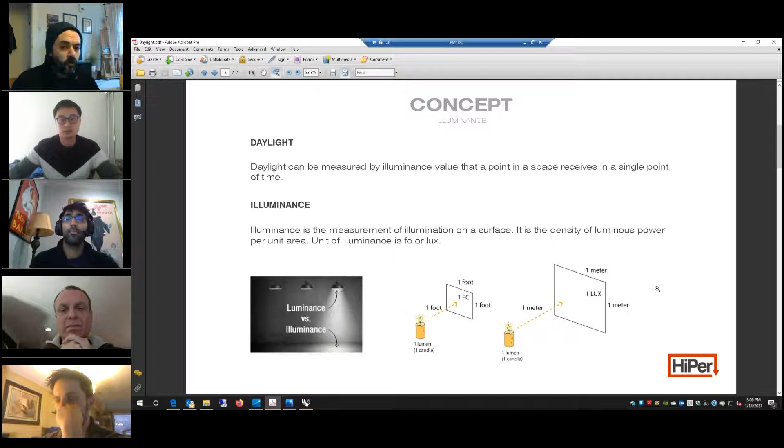So illuminance is a point-in-time measurement of daylight. But for the annual daylight study, we know that there are 8,760 hours in a year, and the occupancy hours are different based on different building types. So we are using 2 concepts to measure the annual daylight.

If you want to further quantify what percentage of these red and yellow areas are of the total area on the floor being analyzed, that is the concept of spatial daylight autonomy. Spatial daylight autonomy is the percentage of areas that receive sufficient daylight in a year. So daylight autonomy is the percentage of time, and this is the percentage of area.

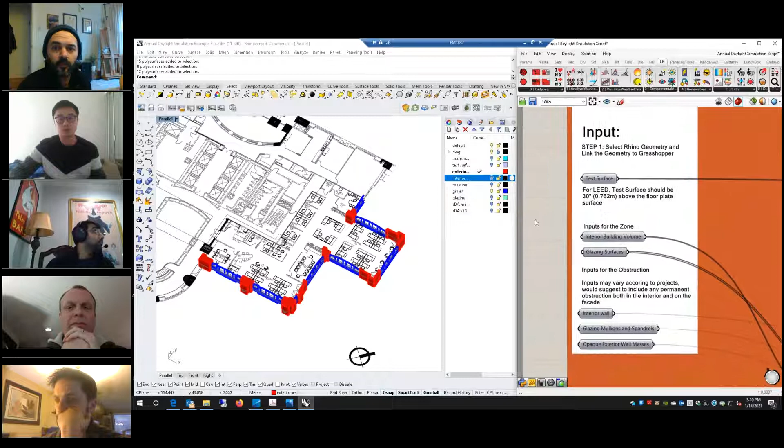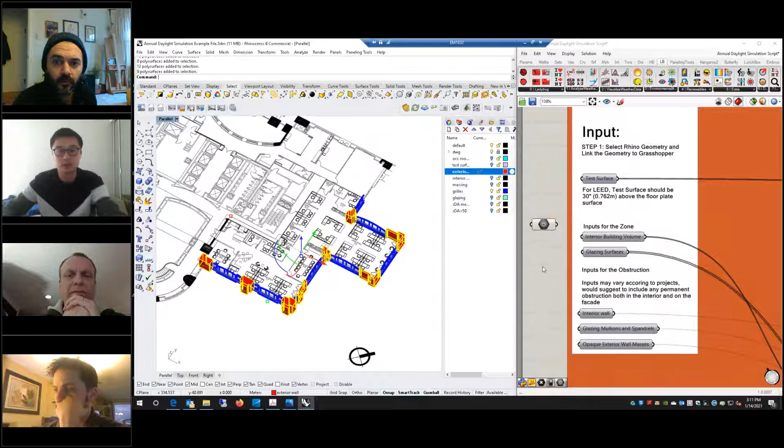So after I have built these geometries in Rhino, I can link this geometry into Grasshopper. What we can do is create a geometry component in Grasshopper and use set one geometry or set multiple geometries. For example, if I want to input all the exterior walls into Grasshopper, I can select the walls in Rhino, right-click the geometry component and set multiple geometries. And now all the exterior walls are linked into the geometry component in Grasshopper.

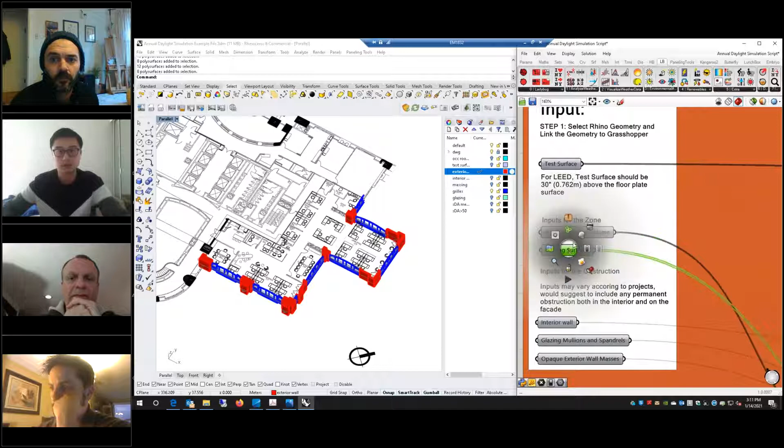So here I have linked the interior building volume, the glazing surfaces, interior walls, the window frames, and the exterior walls in Grasshopper.

Another important thing that we should pay attention to is that we need a test surface for the daylight simulation. The test surface is the surface that actually receives the daylight in the building volume. Normally we create the test surface at the table height, and also the test surface should include all the areas that I'm interested in to conduct the daylight simulation.

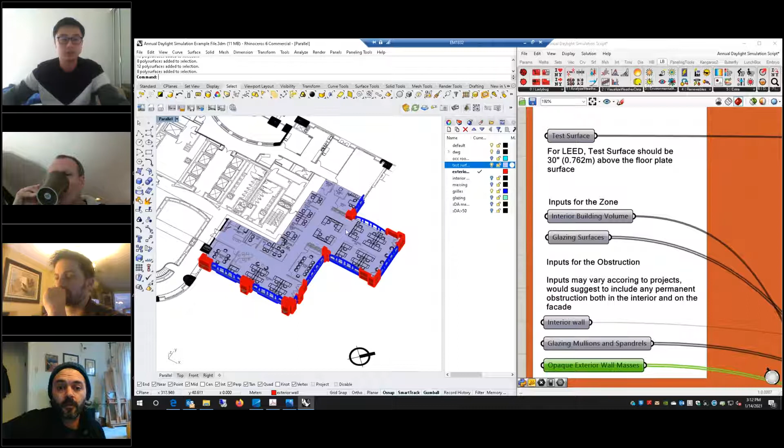So in this case, I'm modeling the whole floor area as the test surface. But if you are only interested in, for example, this small area, you only need to model this area. You don't have to do the whole floor. It's based on what you need for the analysis. And I also link the test surface in Grasshopper.

So first, there are several components that transform our geometry into the zone that has the building information. For example, first I pass this interior building volume to this Honeybee component called Mass to Zone. What this component does is transform this zone geometry into a geometry that has the information of this building.

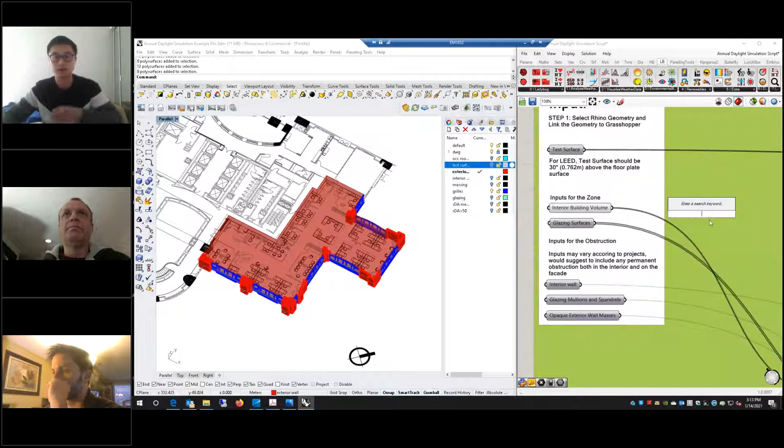To make this more clear, we can use a panel to see what it is. If I link a panel to the zone geometry, it only has the information of the geometry itself. But if I plug this into the panel after this geometry is passed through this Mass to Zone component, by default, this component gives a function to this geometry. Now it is an open office, and this space is conditioned.

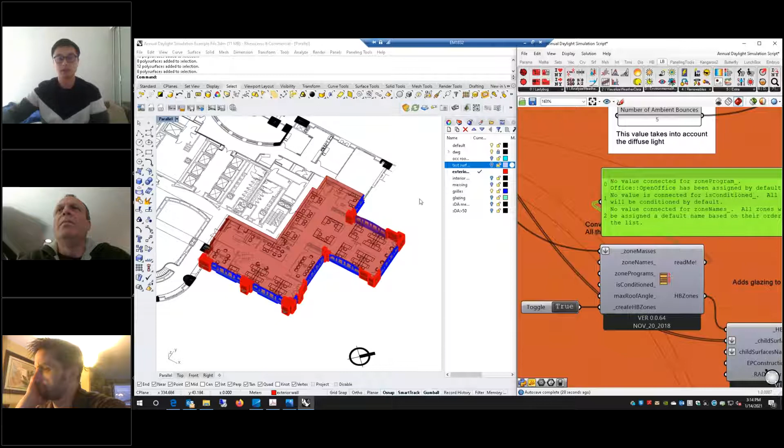If you recall, for the daylight autonomy we are interested in the percentage of time of the occupancy hours. So after this geometry has been assigned an office function, later for the daylight simulation, Grasshopper will know that this is an office and the occupancy hours for this office are from 8 a.m. to 5 p.m.

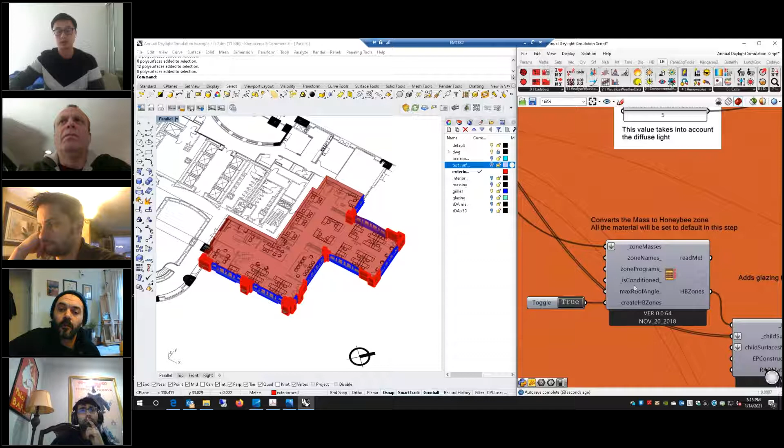And you can also change the program by plugging more information here, the zone program. And if you are doing an energy simulation, for example for a passive house, and you don't want the space to be conditioned, you can also use the function here to turn off the conditioning in this space.

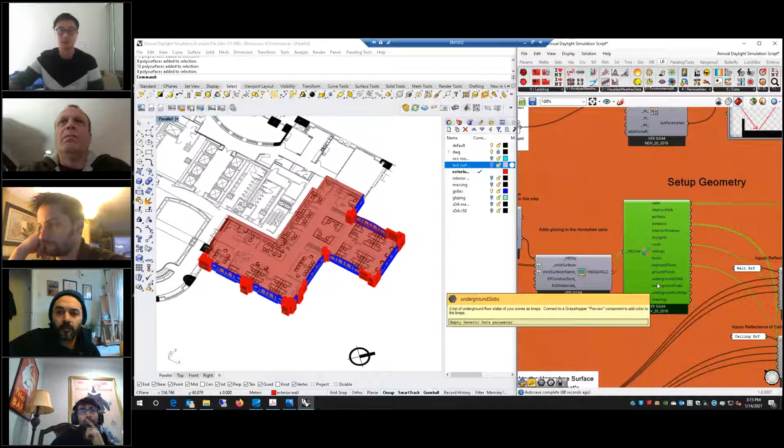And after that, there are two components here. What they do is add the glazing to this zone geometry and decompose the geometry into different building categories. So if I turn off the building volume, now you can see when I pass the zone to these two components here,

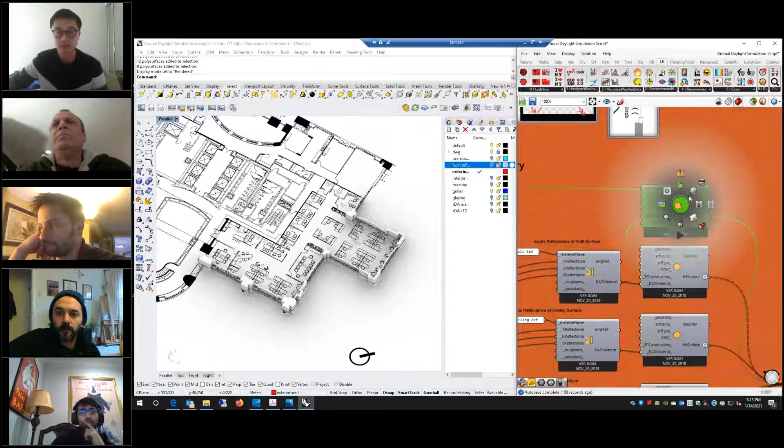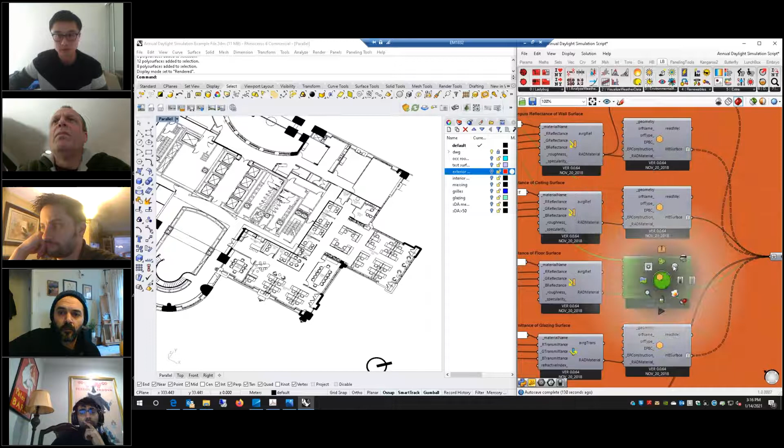now Grasshopper knows that this is the opaque wall on the facade, this is the ceiling, this is the floor, and this is the glazing. So in this way, our zone geometry is decomposed into different categories of building components for us to further modify them.

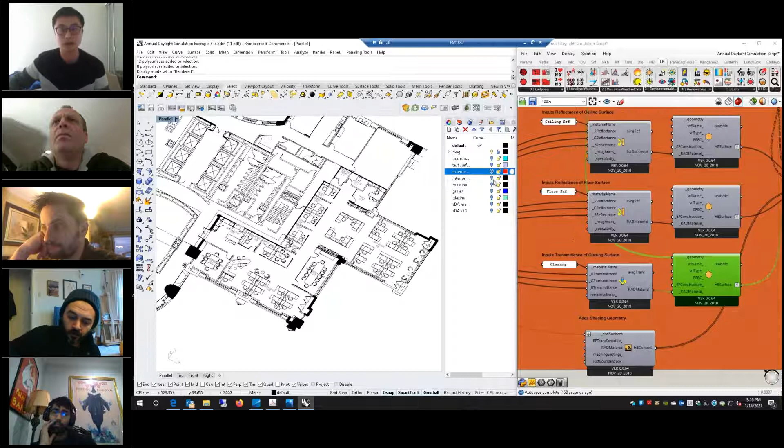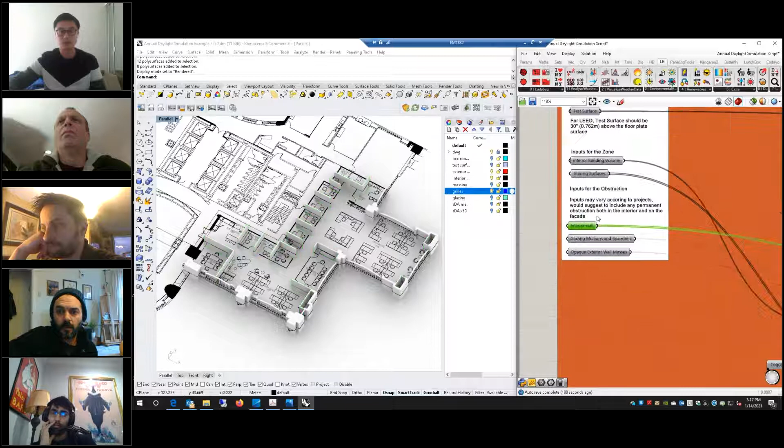And one thing to notice is that we still don't have the interior wall, the exterior wall, and the window frame. That is because these geometries are not generated automatically from the zone geometry, so we need to assign them separately. For example, here I connected the interior wall to a separate Honeybee surfaces component.

And as for the exterior wall and the window frame, because they are outside the zone, I treated them as shading elements which block the daylight. So I pass these two geometries.

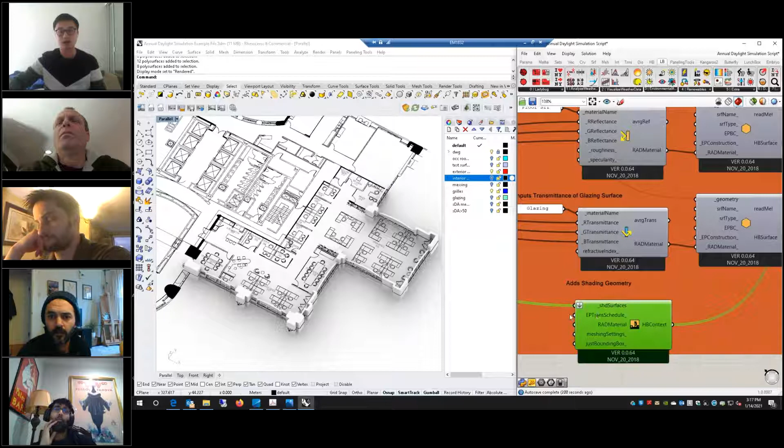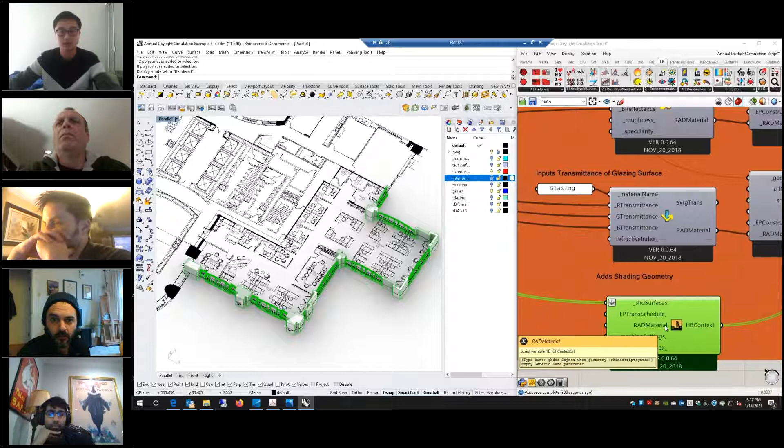I pass these two categories of geometries to a component called Honeybee context surfaces. So in this way, these two layers of geometries are treated as the shading elements in the daylight simulation, which will block the daylight. So now we have successfully created and separated the building geometry into different categories.

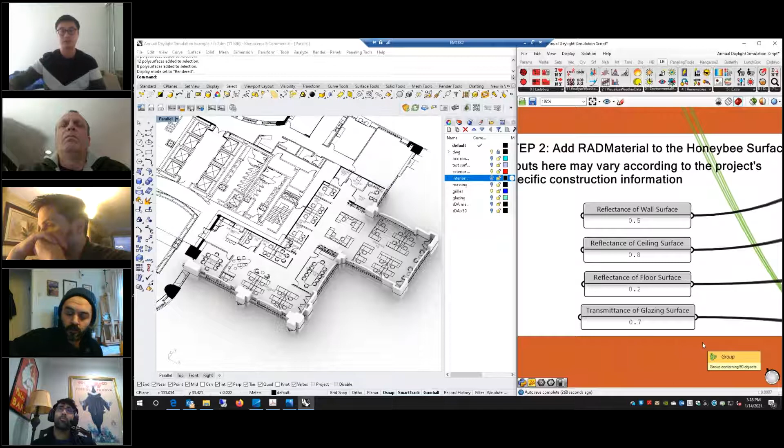And the next thing that we need to do is give each geometry a value for the material. As we know, for the transparent material, we need to give it a transmittance. Transmittance is the amount of light that goes through the glazing when it hits the window. And for the opaque building elements, for example the floor, the ceiling, the wall, we need to give them a reflectance. Reflectance is the amount of light that is reflected when it hits these opaque surfaces.

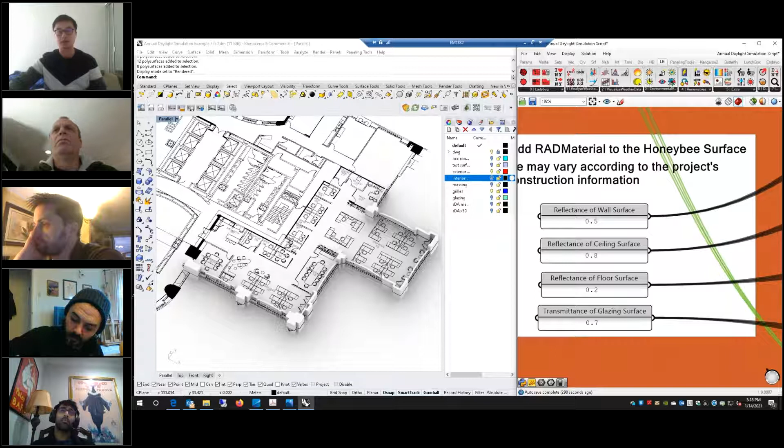This value is something you can find from the product information from the manufacturer, and it varies from project to project, and you need to change these values based on your design. And now we have prepared all the geometry that is needed to do the daylight simulation.

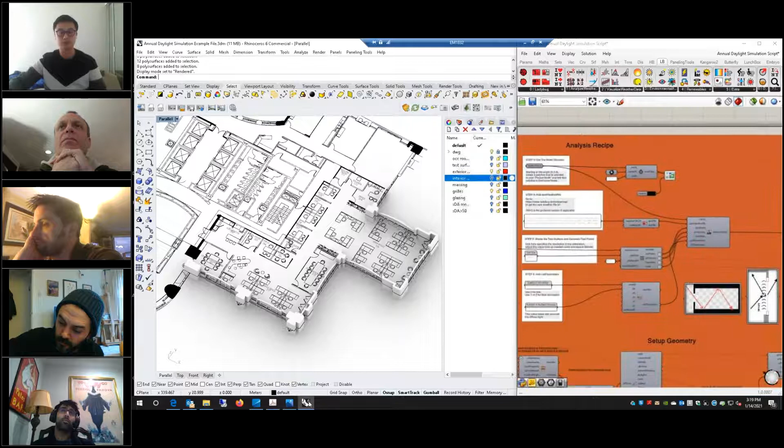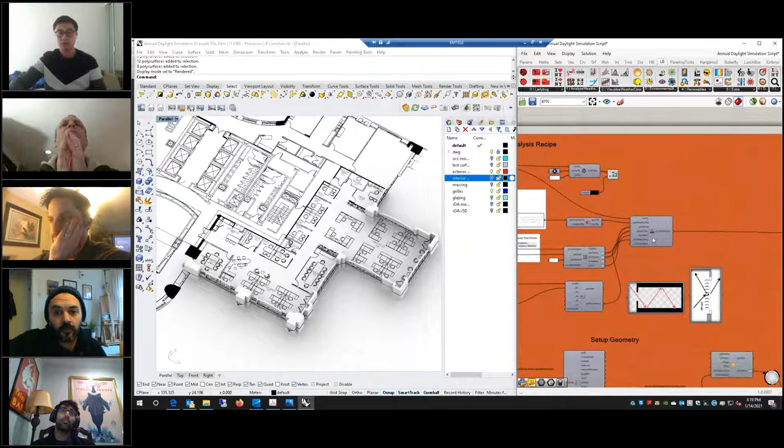And part 2 is the analysis recipe. To understand what this is, it is very similar to the recipe when you cook. This is like the material that we prepared, but with only the materials, we are not able to do a daylight simulation. We need a recipe to process them. So here there is a component called annual daylight simulation. It tells us all the recipes that we need to process all the geometries.

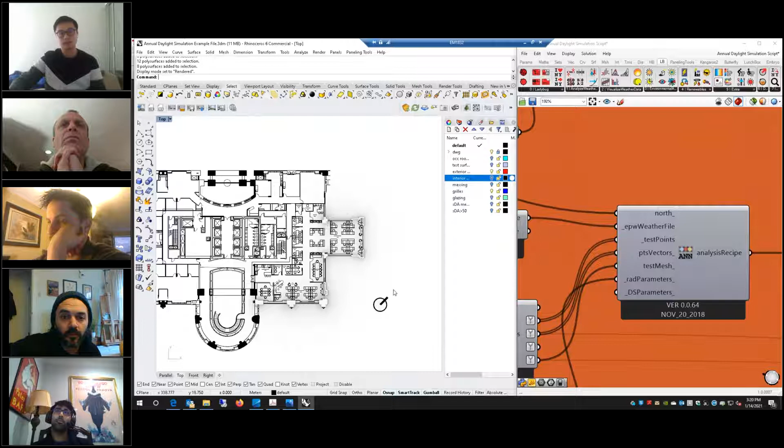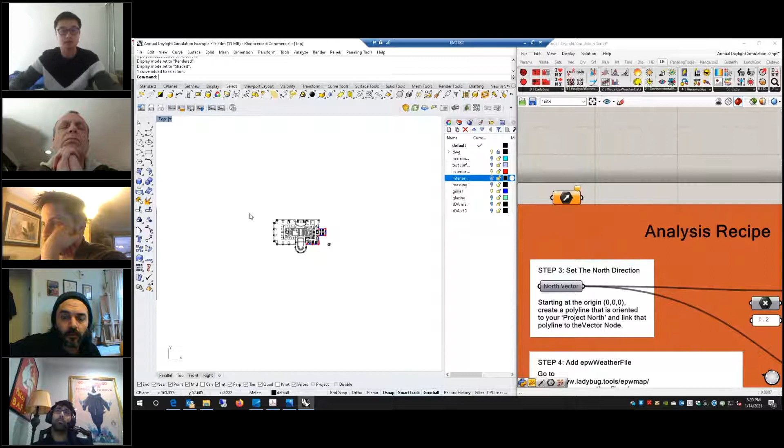So the first thing that we need is the project north. By default, Grasshopper will think that the top of the screen is the north. But as you can see, for this project, the north is 45 degrees from the north. To modify this, we can draw a line from the origin in Rhino with the same direction as our project north, and we can use a vector component in Grasshopper, link this direction into Grasshopper and plug this into the north, so that Grasshopper knows our project north.

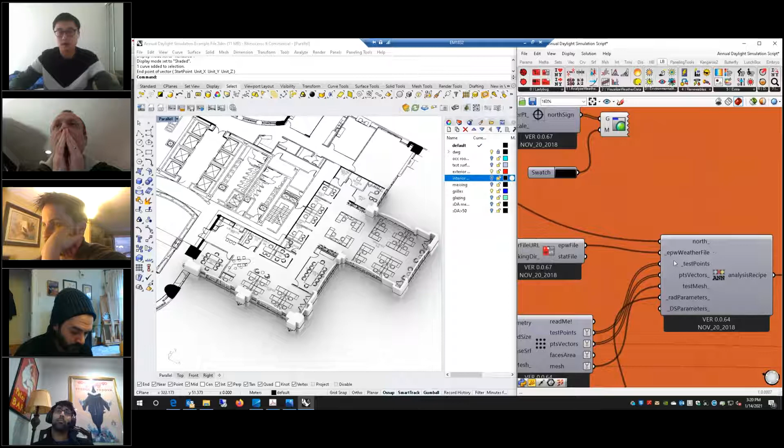And the second recipe that it asks for is the EPW weather file. There is a component in Ladybug called Ladybug download EPW weather file. If you put this onto the canvas and activate this component using a Boolean toggle, a website of the EPW map will automatically pop up, and we know that this project is in Boston. So we can type in the city name and search for the location of our project. Now you can see these are the dots of the weather stations in Boston.

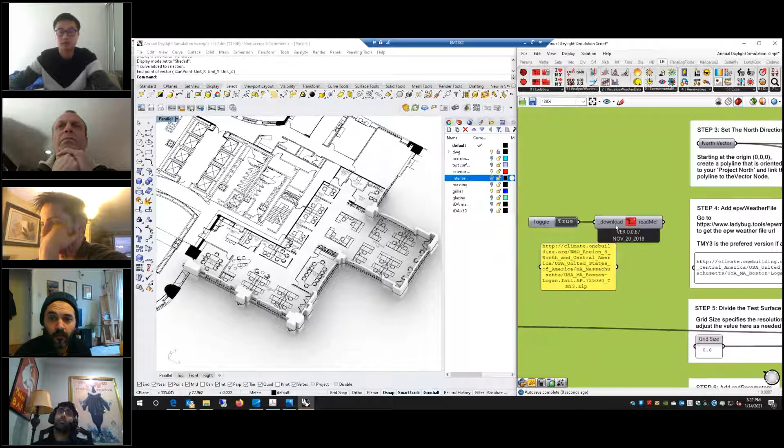By clicking on one weather station, I can copy the URL of this weather station. And if I go back to Grasshopper, I can paste the URL of that weather station onto my Grasshopper canvas and plug this into the weather file URL, so that Grasshopper knows where this project is.

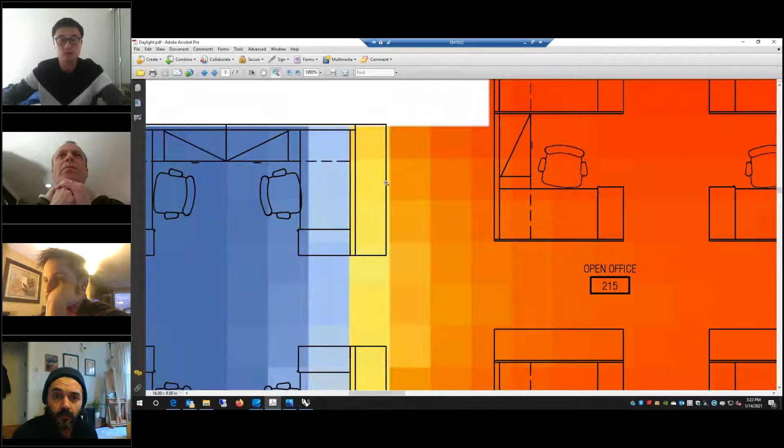And the third thing it asks for is the test point. The test point is generated from the test surface that we just created. To understand this, if you look at the analysis result on this graph and zoom in, you can see these little squares. So this is one grid. And by assigning a grid size here, we are able to generate these equal size small squares on the surface. The smaller the grid size, the smoother the graphic we get in the end, and also it takes longer to run the analysis.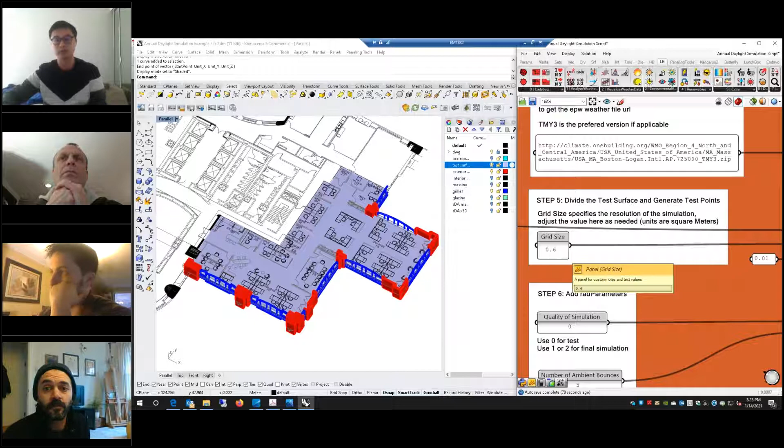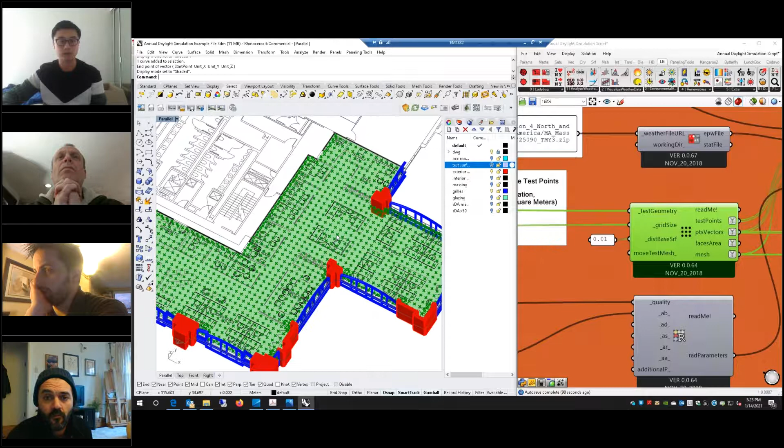Normally the largest grid size should be 24 inches by 24 inches, which is 0.6 meters in our case. And you can make this size smaller if you want a better graphic. After we set up the grid size, this component will generate the test points on the test surface. Each point will be used to record the value from the daylight simulation.

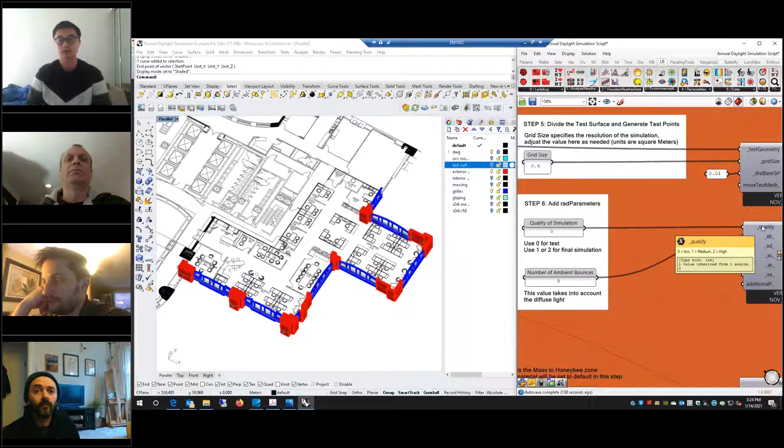And last but not least, it asks for a radiance parameter. In the radiance parameter, we can define the quality of the simulation that we want. In this case, we have 3 choices: 0 is the lowest quality, and 2 is the highest quality. We always start from 0 here if we are doing a test. And if we choose 1 or 2, it may take hours to run one analysis.

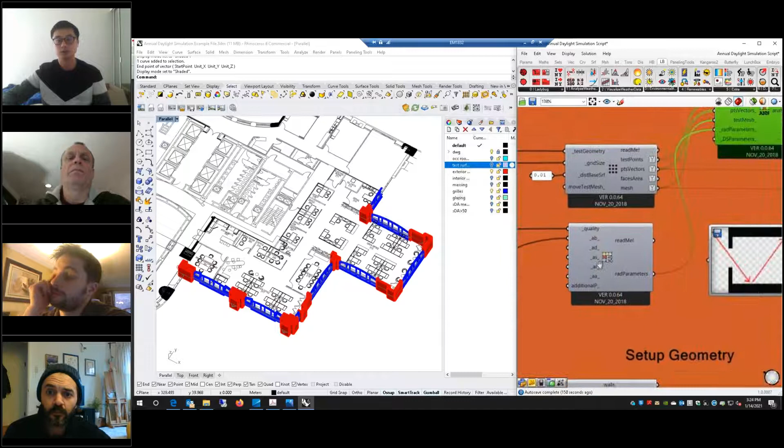So the other thing is the AB. AB is the ambient bounces. Normally the number for ambient bounces is 4, and you can increase that number. So to clarify what ambient bounces is, here are 2 graphics.

If you look at this section of the room, let's say here is a test point, and the light goes this way and this way and this way before it reaches the test point. In this case, we can see that the light is bounced twice before it reaches this point, so the ambient bounce is 2.

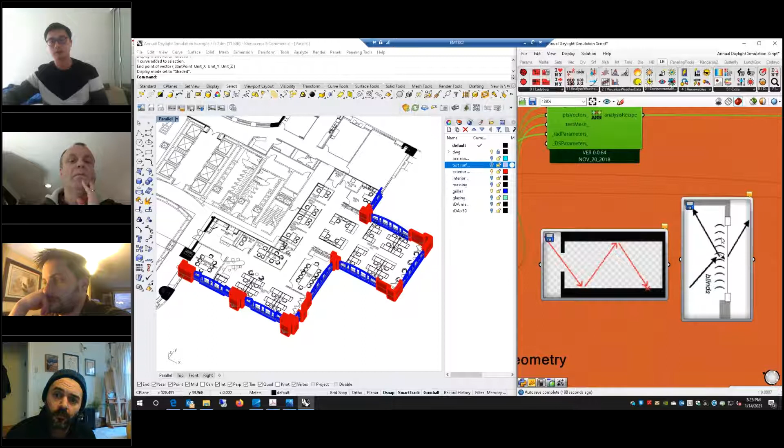But imagine if we are simulating the roller shades behind the window, the light maybe bounces several times before it enters the room. And if the room is deeper than that, it will also increase the number of bounces. So to be safe, I use 5. And you can also increase these numbers as you need.

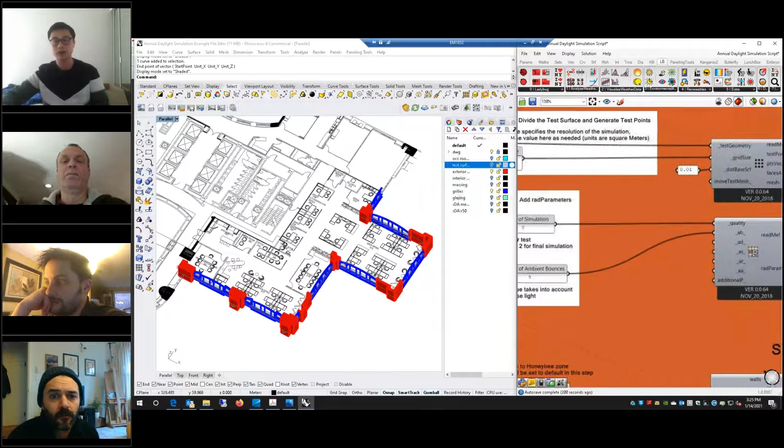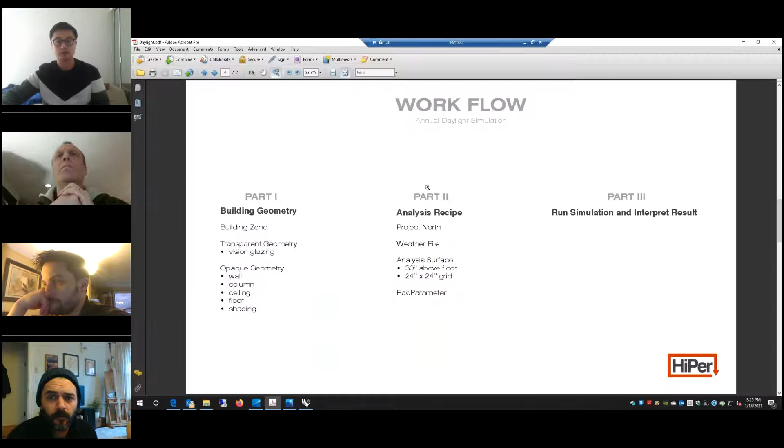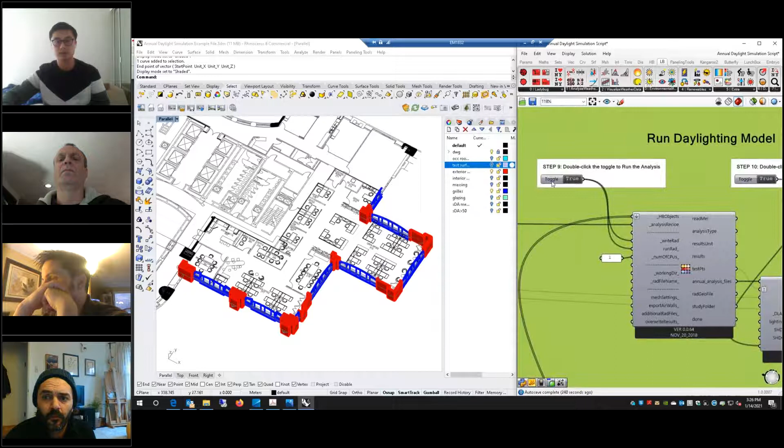So now we have set up the recipe for the analysis, and we have finished part 2. We can go to part 3, run the simulation and interpret the results. We are using a component called the run daylight simulation component. We plug the geometry that we created into the honeybee object, and we plug the recipe into the analysis recipe, and by clicking on the Boolean toggle, we are able to run the analysis.

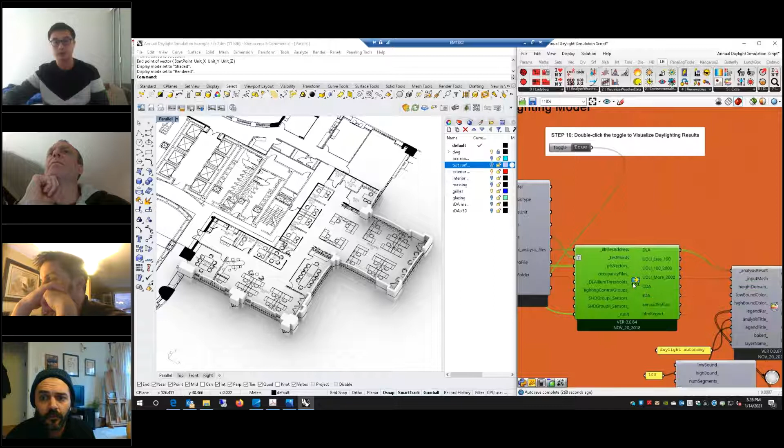I have run the analysis before this session, and after the daylight simulation is finished, we can pass this to a read annual simulation component, which extracts the result data and processes it into the data that we want. We are interested in the daylight autonomy in our case. If I bring a panel here, these are the daylight autonomy values generated for each and every point.

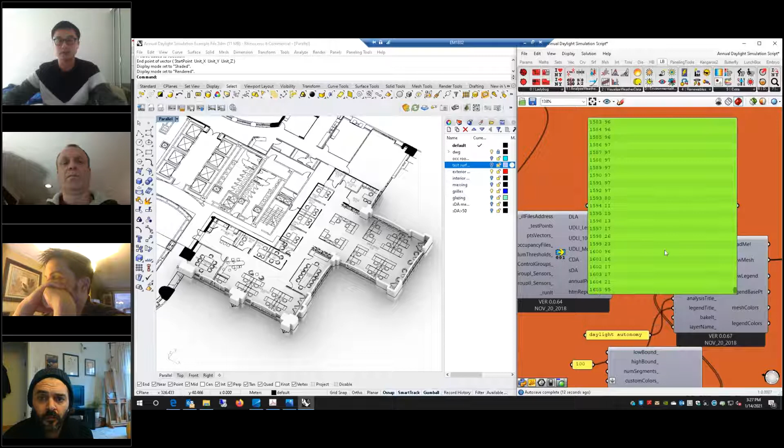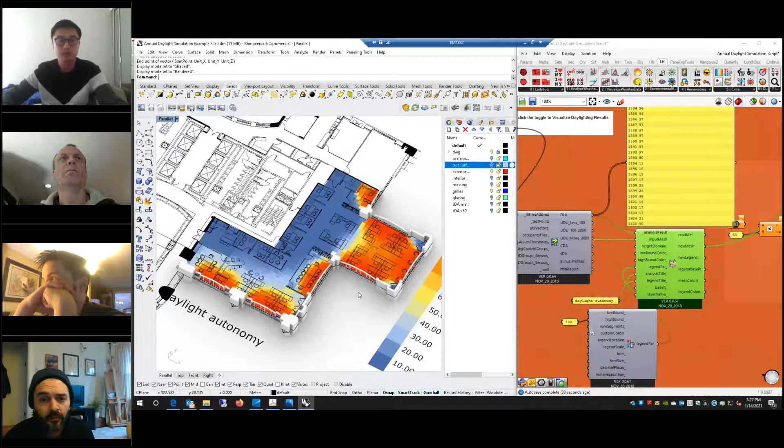In total there are 1,605 points that we generated from this component, so each point has a daylight autonomy value. And we can use a component called recolor mesh to plot this result onto the floor plan so that you can see which area reaches the pass threshold of 50% daylight autonomy and which area does not pass.

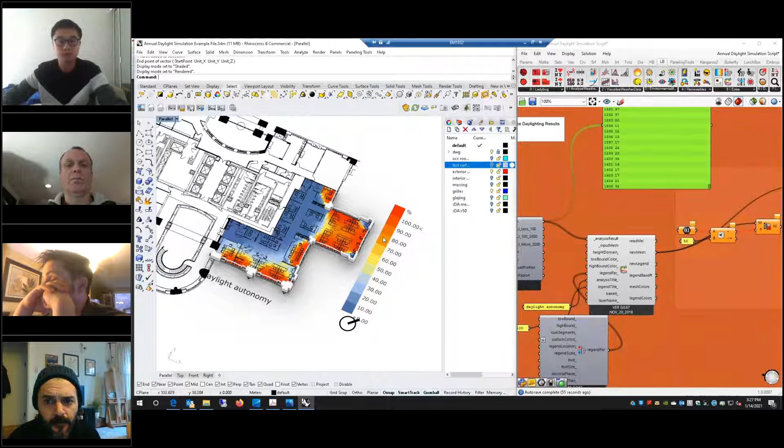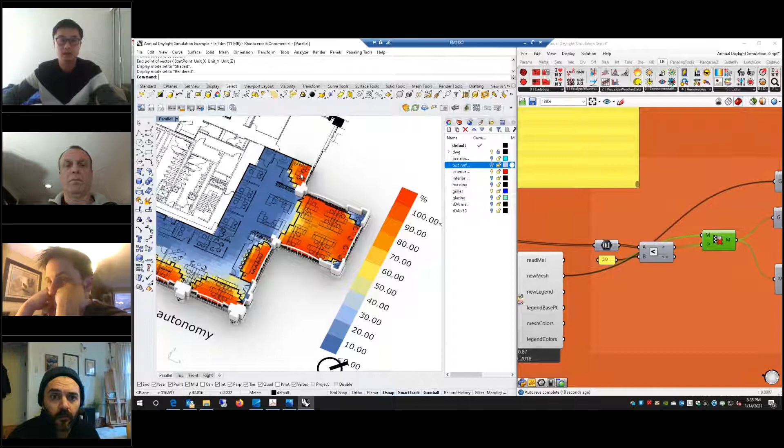There are multiple ways to further process this data. For example, in this case, I can pass the result to several components. I'm using this component called cull faces, which removes the areas that do not pass the 50% threshold and only selects the areas that pass, so that I can divide these areas by the area of the whole floor. So I get the percentage of the area that passes the 50% threshold.

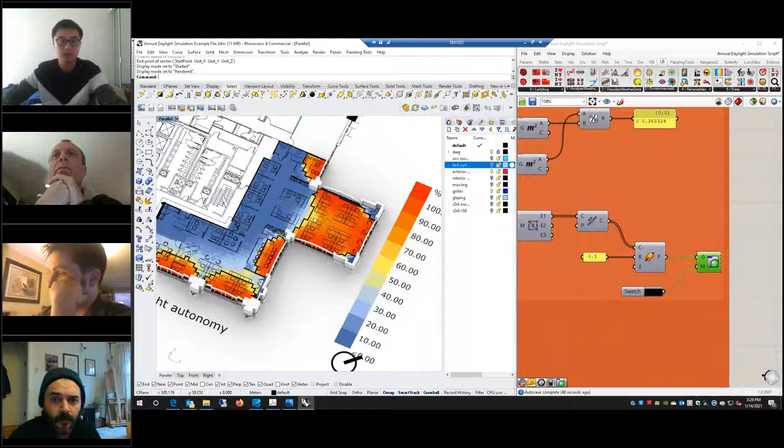And I can also pass these areas into several components and use a thick black line to highlight these areas. This is something that we can show to the client, saying on this floor, these are the areas that have sufficient daylight, and these areas share about 36% of the whole floor area.

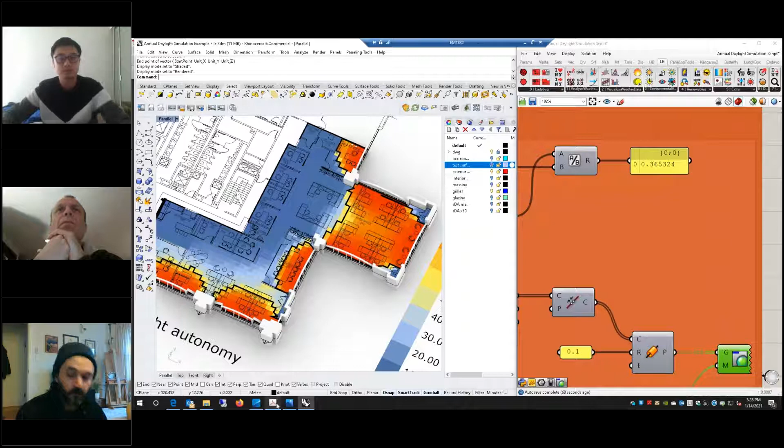Based on this workflow, there was a project that I worked on. It is an apartment unit project. We used annual daylight simulation to simulate the daylight in each apartment unit. We started the base case from 50% window to wall ratio, and we wanted to reduce this number further, so we tested 40% and 30% window to wall ratio. We found that at 30%, we still have enough daylight in the living area, which gives us the confidence to reduce the window to wall ratio to 30%.

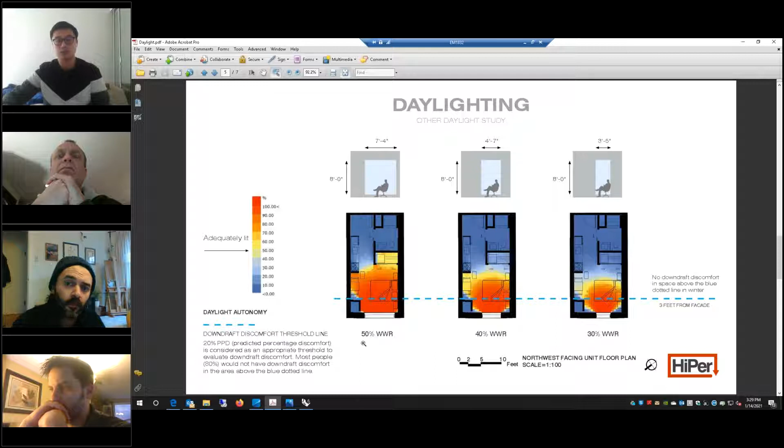We keep the window to wall ratio at 30%, and we think that if we increase the sill height from 8 inches to 24 inches and make the window wider, we are able to further improve the daylight environment in the living space. So in this project, we are able to reduce the window to wall ratio and still have a good daylight environment in the living space of the apartment unit.

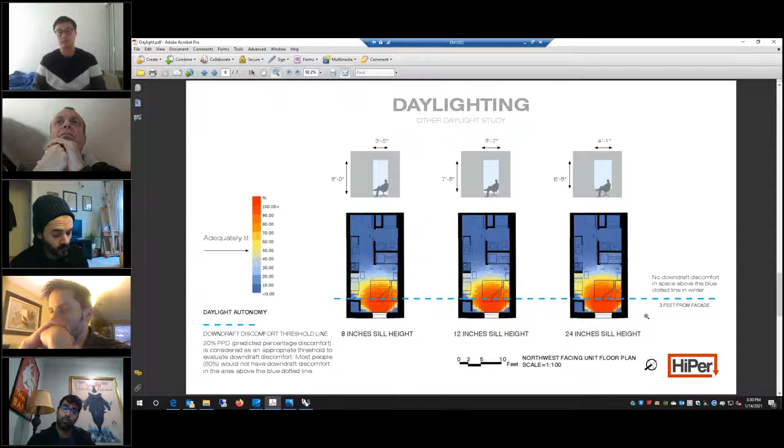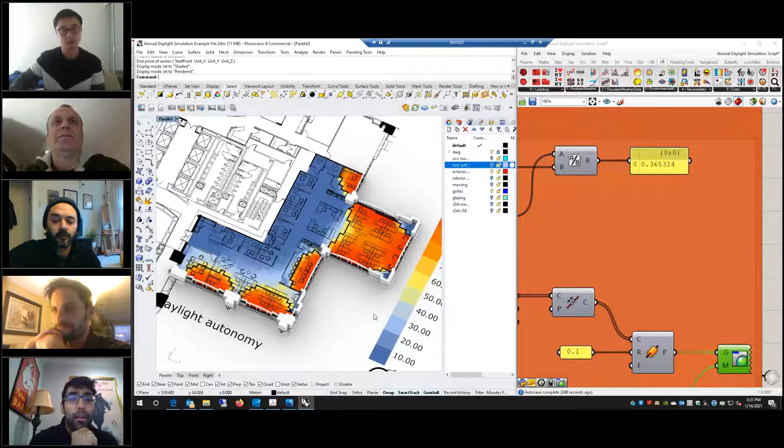So for this, I'm doing this on this floor. For the whole building, I will build the model on each floor and do several simulations, and then I will calculate the weighted average of the result from each floor and get an average daylight autonomy from that. Cool.

Is there any way, Bohan, to take exported geometry from Revit for a small area, say the same sort of study area? If we carefully set the export settings such that all the glass went to a certain layer and all the mullions went to a layer, interior walls, could we do that in a way that you didn't have to rebuild it in Rhino? I'm trying to find a better workflow to not have to redo all this work.

Yeah, I can take that question. I think the best successes we have for this type of model come from the general massing components. However, I have seen walls and window systems come in pretty clean into Rhino. I think there's some exploration to be done about what happens in Revit specifically to make the geometries closed and solid and come in perfectly on a layer. But I do believe it's possible.

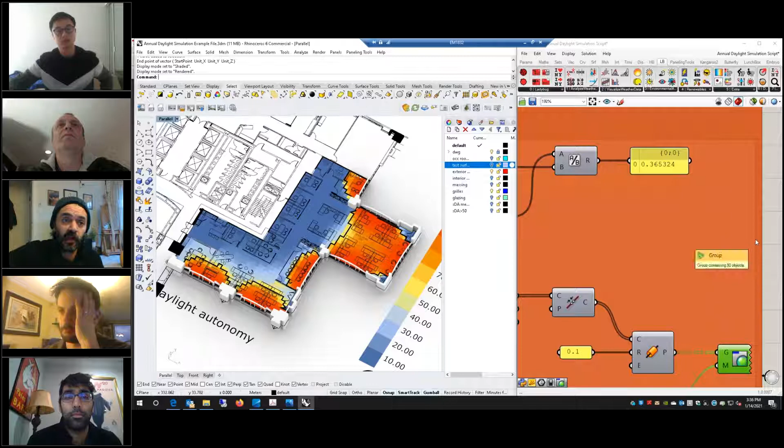Yeah, I've done that before with a frit. Similar to the surface geometry that is creating the window frame, you can add three-dimensional solid geometry for that frit pattern. So if you had a two-dimensional CAD drawing, you can extrude it into 3D, add it as part of the opaque solids and give it a material. And then, of course, the light won't go through it.

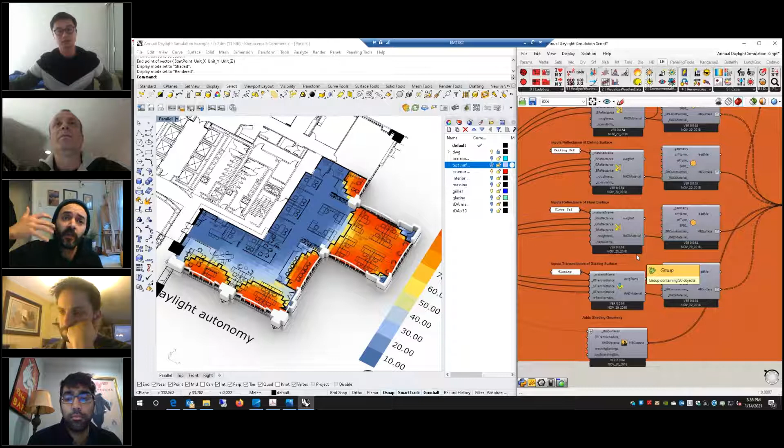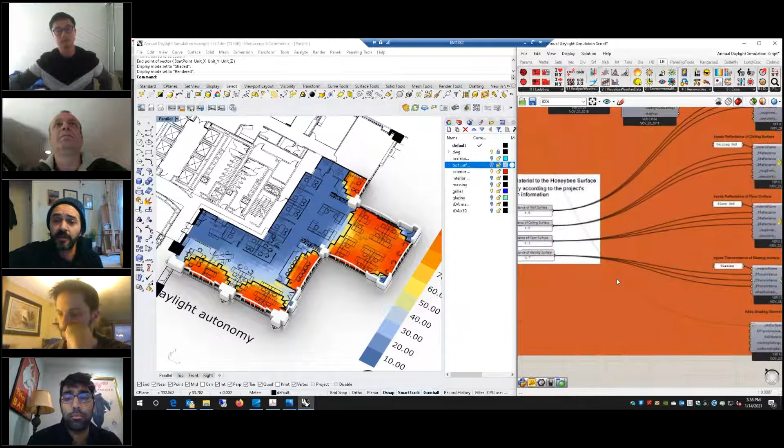Now, whether or not you're going to see that result impact will have everything to do with the grid size of your sampling and the quality of your output with the script. Because if those things are very tiny, let's say a 1/4-inch diameter dot, that might just fall off the table in terms of the range of scope that we're looking at for the 1/2 meter by 1/2 meter sample area.

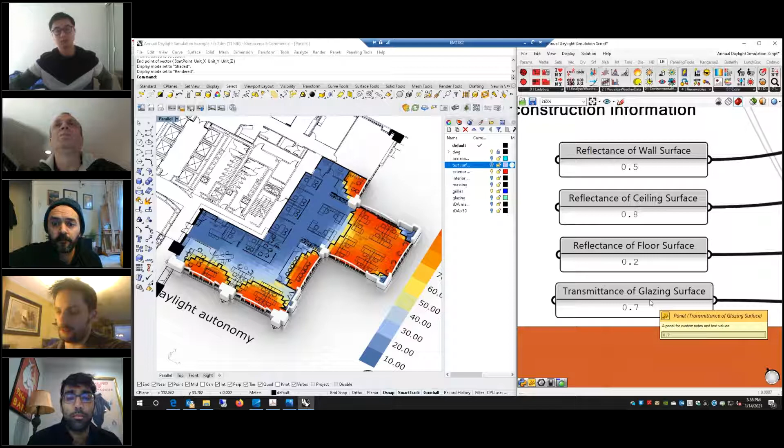I'm just thinking of the Desmond question in Cambridge side. He wanted to do different variations of frit and see the impact on the daylight analysis. So that's why I asked. Right, and I worked on that project specifically, and we achieved that with a daylighting simulation, a different version than this, a much earlier version.

But couldn't you also just get a general number for the transmittance, or the values of what this percentage fritting is for fritted glass, and then just set your glass to that instead of even modeling all of it, right? You can modify where it says reflectance and transmittance, what Bohan is showing. You can really just tweak that for fritted glass, right? And then that could be good.

I would say it's easier if we just do this calculation before we work in Grasshopper. We just need to calculate what the transmittance is from the fritted glass, so we don't need to model that detail in Rhino. Right, I would agree. The likelihood that one of those dots actually hits one of your sample points is pretty low. So yeah, I agree. It's probably just setting a number, right.

Yeah, in the example that Josh was describing on the other project, the frit pattern was such that as it moved up the building, the percentage of frit changed in a transitional gradient, a complete gradient. So applying a transmittance value to the entire glass plane wouldn't account for that gradient change vertically. So you might have to split it into multiple panels of glass, which again would be a hard stop at each transmittance value.

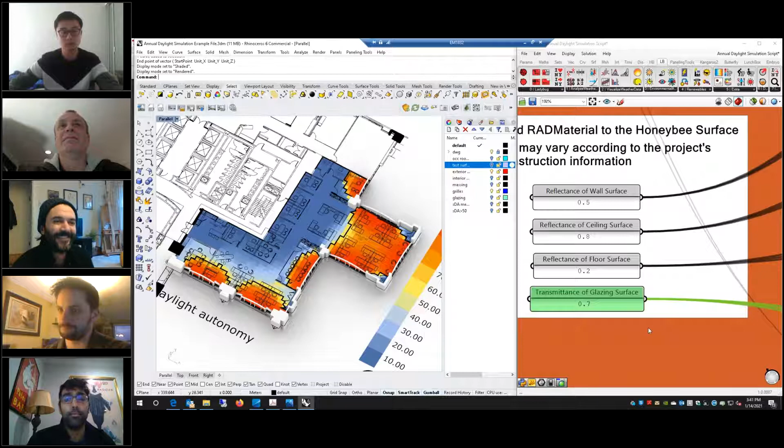But does this account for the height of the floor within the building? And to add to that, if there are context buildings around the windows outside, can you work that into your calculations?

Sorry, you're asking about the... well, there are two parts. So if your floor is on a low level, then presumably you'll get less light than on a high level, and that might be a result of context buildings that are surrounding the study building.

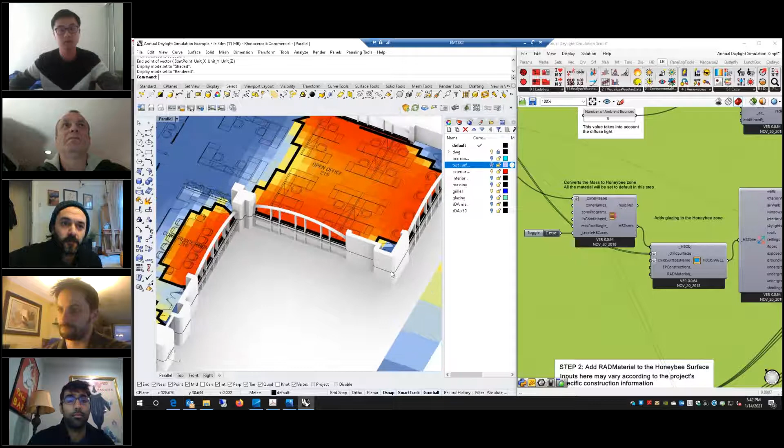Yeah, so if you have a context building, you can build that geometry and input into Rhino, and also you can plug that into this component called context surfaces. So this will take that into account.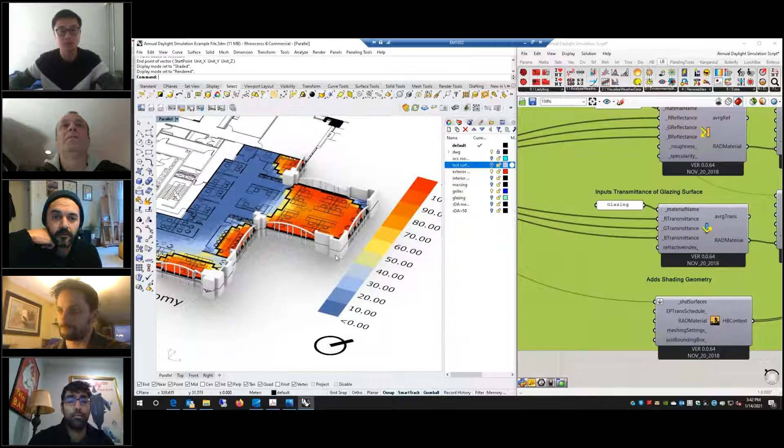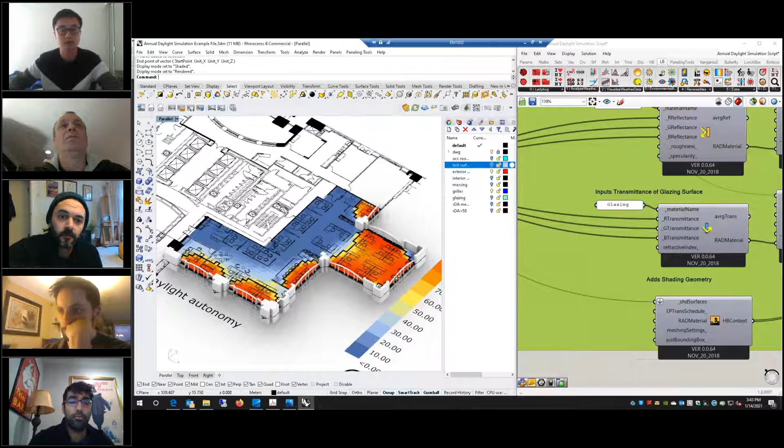And normally, in terms of the height, what I will do is import this DWG file from AutoCAD, and when I import it, I raise the height of this to be the actual floor height, and I build the building geometry based on this DWG file, so that the geometry is the same height as the real building.

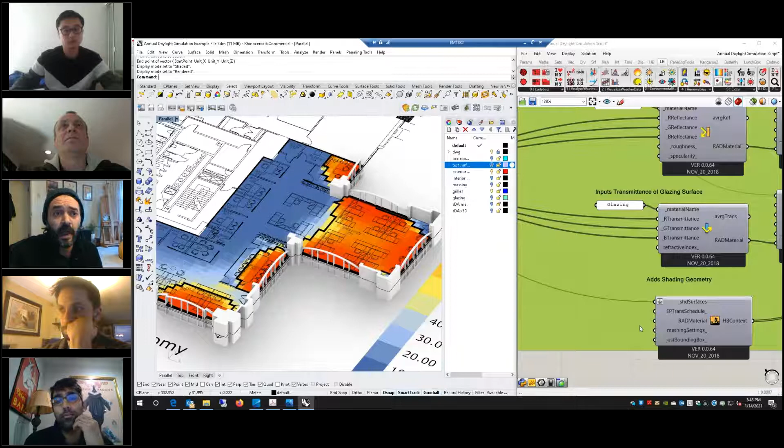That's right. Cool. Yeah, I do the same thing in the Z, getting the building up to the right height. I think it's important to know - I asked that same question, Christine. I was like, well, what about the context, what about the building that's right next door? The answer I was given is that for LEED, you actually don't have to include the surrounding context. If I'm wrong, Kristen and Bohan are going to have me on a stick, but I'm pretty sure that's the answer I got - you don't need to calculate it for LEED.

This is directly related to the project that I'm working on with Genevieve, who's also on the call. We're trying to study the impact of our proposed buildings on some condo owners living nearby, and we want to know impact to views, but I guess impact to access to sunlight would be also important. We want to know how far our buildings have to be before their living room gets cast in shadow.

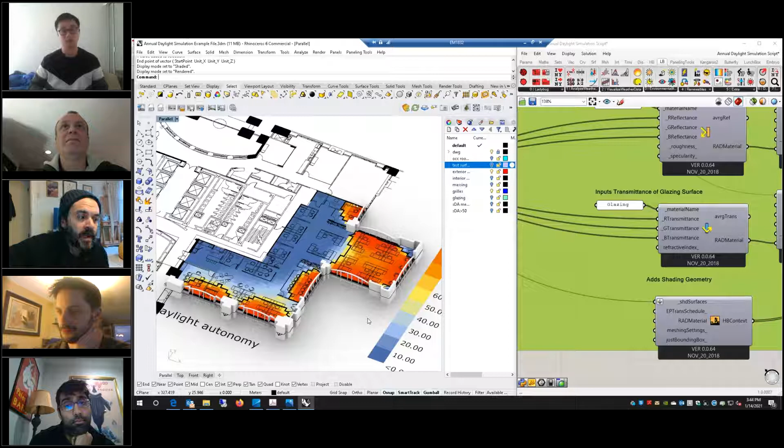So it'd be an interesting study for us to do together. I should point out that the scripts and the things that we're trying to build as a team and share with everyone - maybe there's a way that you can go back through this entire video and do it step by step by yourself. Chances are that's going to be pretty challenging the first time, so reach out to me, reach out to Bohan or Anish or Kristen Fritsch, and we'll get you the support side by side to help through this process. That's also what we're here for and available for.

And when you talked about a view study, I have a separate script that's all about view corridors and obstructing them or keeping them open. It's very graphic and beautiful. So if you shoot me an email, I can set you up with that one. I think that one is super easy to use, especially with someone like your experience, Christine.

Also, for Christine's question, if there are context buildings near our project, I think it has a bigger impact on the views than on daylight. So when we were doing the view study for LEED, we do consider these context buildings, to make sure that they are not blocking much view from our interior. LEED has a requirement on this - within which distance you should not have that context building block your view. So I think this is something maybe related to that.

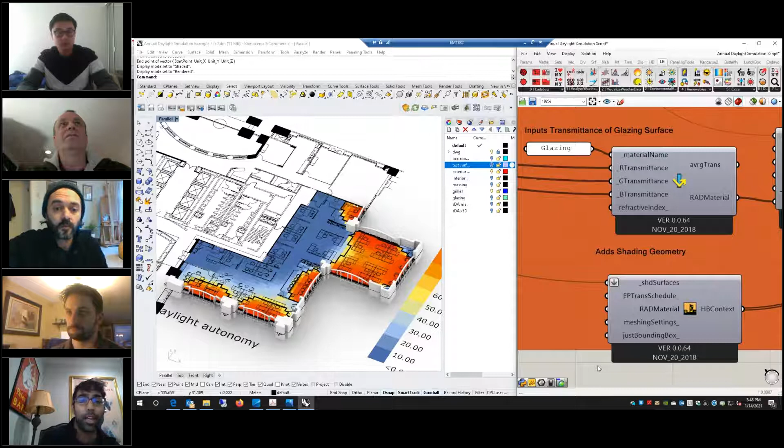I think that's really one of the big things - you want on your projects to advocate for everyone to be making good geometry that's categorized, layered, and fully solid. Even if someone is like, oh, in SketchUp I can just paper over walls and just get through the day - people just do these models to get through the day. But if you hold yourself to a little bit of a higher standard, you can save yourself a lot more time down the line and take advantage of a lot of these really powerful design tools.

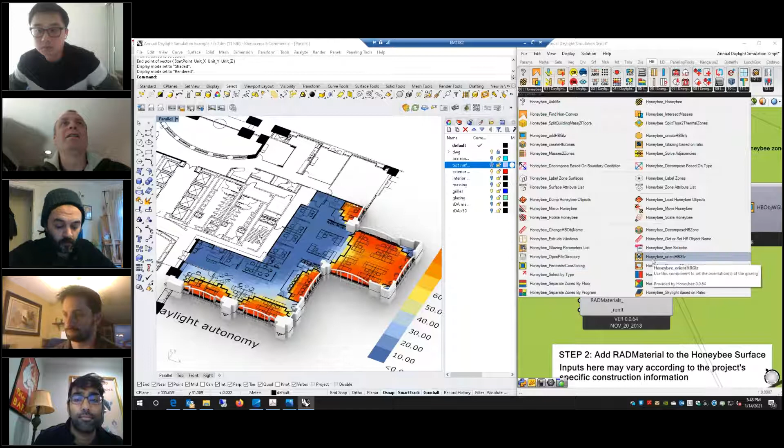So yeah, people know what the opportunities are and they know what the rules are. We can always hope that they will eventually model with that in mind, knowing that that will save them time. If they're just going to sling the model at somebody else and let them worry about it, then there's less hope for that, especially for SketchUp users, SketchUp models, because it's usually more frantic and it lets you get away with a lot more.

But anyway, that's to be continued, and we'll be looking at this - how can we save stuff out that can maybe drop right into a study and be useful, separatable by category, so that you can select it and drop it into these nodes. Maybe Jackie and Bohan can work together a little bit, and I'll look over your shoulder.

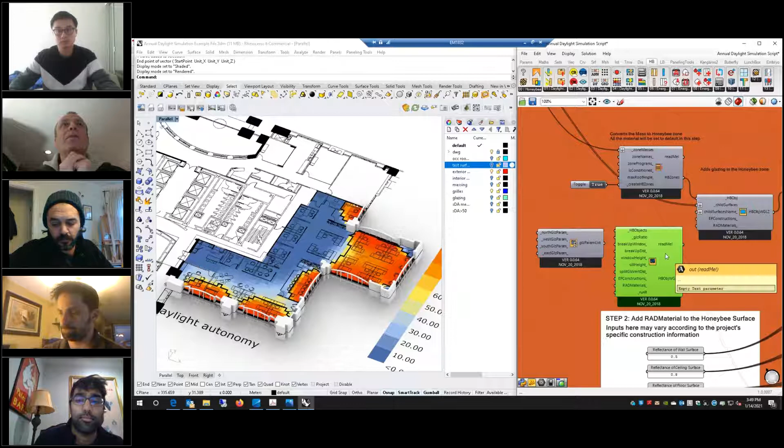You could, yeah, there's definitely opportunities to cross collaborate between our different areas of expertise and bridge those gaps that we're seeing. We could go on and on about design workflow and the right software at the right point in a project.

I don't think you're going to convince many of us, like with Anish and I, that we're going to transition our design workflows into Revit. I think our priority and preference is to educate in Rhino and Grasshopper. You will see some sessions coming out for Intro to Rhino, all the way through some pretty advanced workshops in the same video tutorial. Joe, Kyle, and I are working on that with the fabrication team.

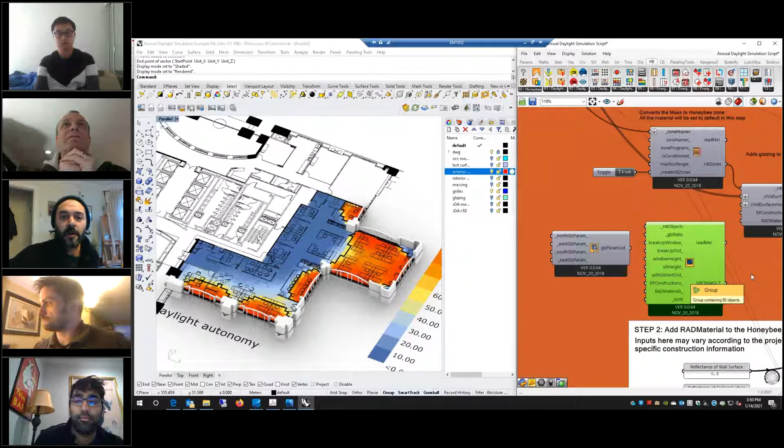So if you're interested in transitioning yourself from SketchUp into Rhino, if you're interested in using Rhino and Grasshopper as a design platform and using the geometry that you're developing and getting real-time feedback on data, which can really drive some decision-making from a logical point of view, you can certainly transition the geometry that's making sense and that's been approved, for example, and bring that into Revit for documentation purposes.

We would never suggest documenting a building in Rhino and exporting hundreds of drawings, don't get me wrong. But we find that the greatest value in Revit is the documentation and organization of two-dimensional work, which is the drawing set, where Rhino is a repository for all the three-dimensional work and the data-driven design that's available today. So that's my own two cents, and I'm sure somebody else has a different opinion, of course.

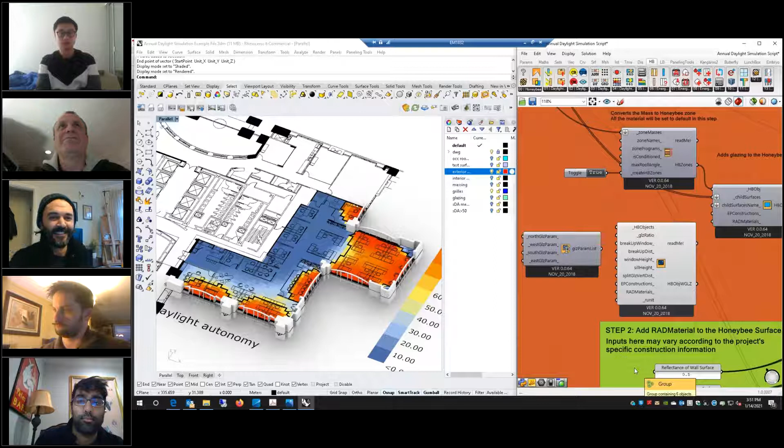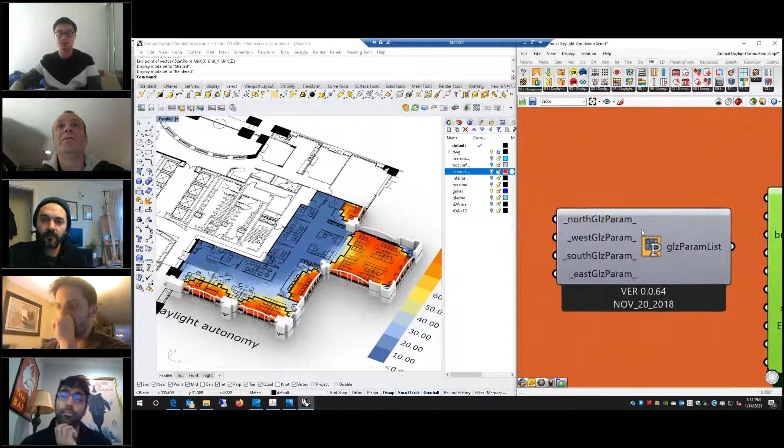And also, sorry - so this is only the foundational components in the daylight simulation, and you can also explore more functions. For example, if you are in the very early design stage and don't know where you want to put the windows, you can use this component that can generate window openings based on the facade. In this way, you can just do a quick simulation and see what the different window-to-wall ratio is based on the facade, and what impact that will have on your design in the very early stage.

That's great, and we're going to hear a lot more from Bohan as part of the high performance group. Thank you so much for being our first super user spotlight star, whatever we're going to keep calling the folks that want to share their hard work and extraordinary efforts - teaching yourself how to make these tools, teaching yourself what data you're solving for and why, and then being able to describe it in such a way. Kudos to you, very well done. Appreciate it - it's a very nice presentation, very well organized and easy to follow. Thank you, Bohan, thank you so much.